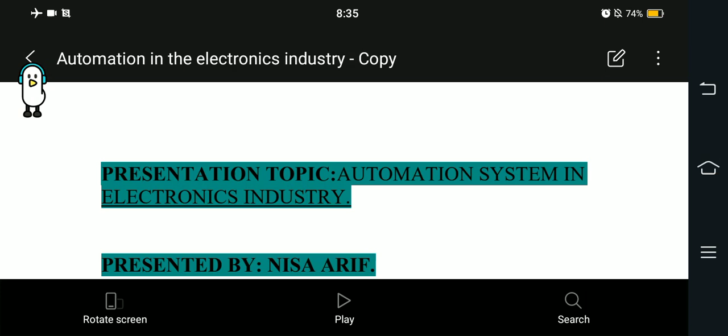So today's presentation we discuss about what is industrial automation, why there is need, their benefits, their applications, their challenges, their importance, and which type of robots used in the electronics industry.

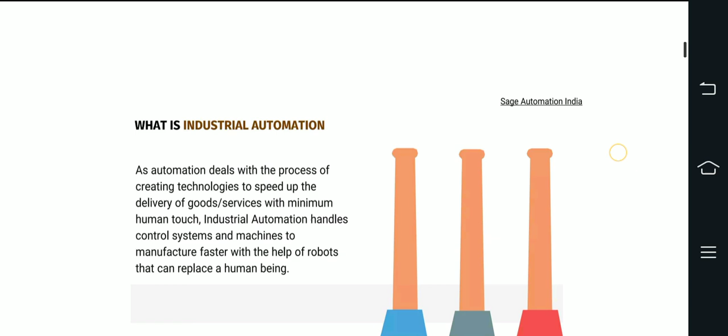So first of all, we discuss about the definition of automation. What is industrial automation? Automation deals with the process of creating technologies to speed up the delivery of goods and services with minimum human touch.

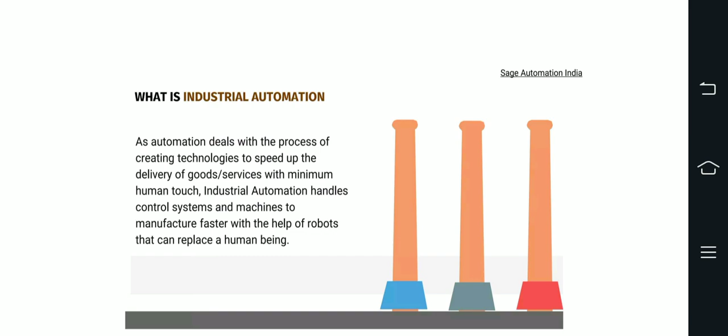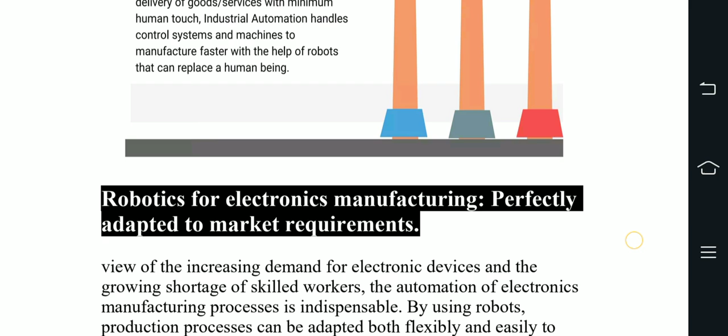Industrial automation handles control systems and machines to manufacture faster with the help of robots that can replace a human being. Robotics for electronics manufacturing is perfectly adapted to market requirements. In view of the increasing demand for electronic devices and the growing shortage of skilled workers, the automation of electronics manufacturing process is indispensable.

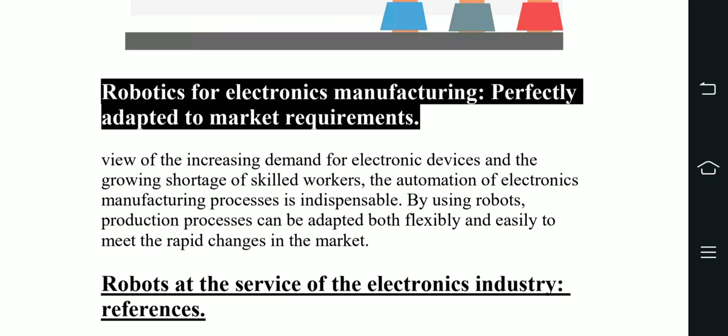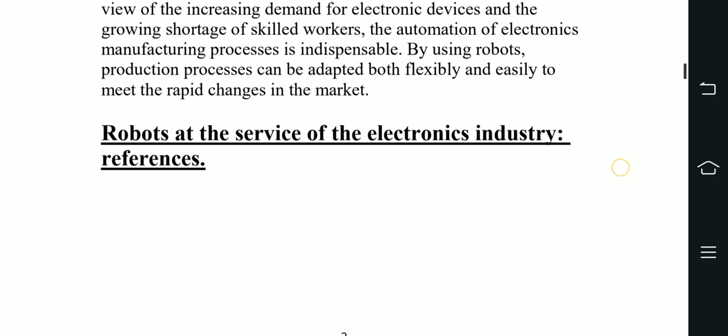By using robots, production processes can be adapted both flexibly and easily to meet the rapid changes in the market. Here are the robots which perform their function in the electronics industry. Next, we discuss about the benefits of automation in electronics.

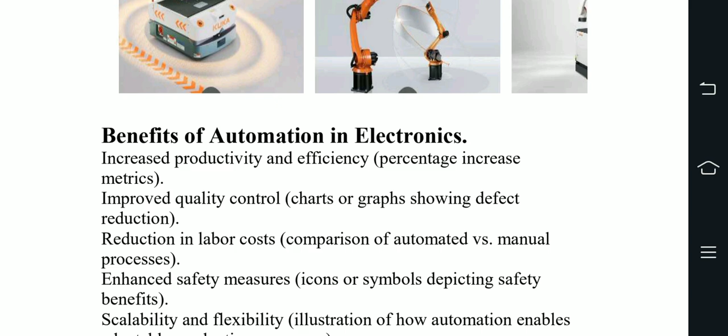First of all, increase productivity and efficiency, with percentage increase metrics. Improved quality control charts or graphs showing defect reduction, reduction in labor cost, comparison of automated versus manual processes, enhanced safety measures, and icons or symbols demonstrating safety benefits.

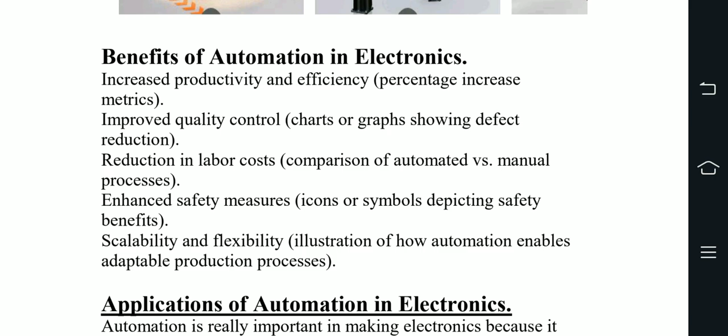Scalability and flexibility: illustration of how automation enables adaptable production processes. Next, we discuss about the applications of automation in electronics.

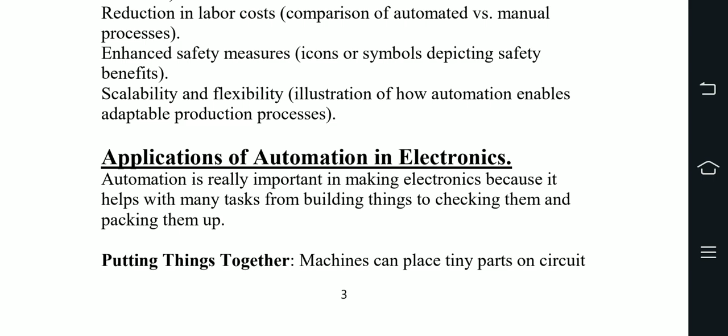Automation is really important in making electronics because it helps with many tasks, from building things to checking them and packing them up. Here's applications: putting things together.

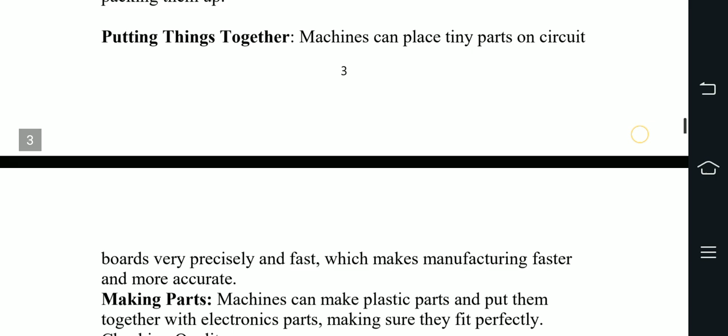Machines can place tiny parts on circuit boards very precisely and fast, which makes manufacturing faster and more accurate. Next one, making parts: machines can make plastic parts and put them together with electronic parts, making sure they fit perfectly.

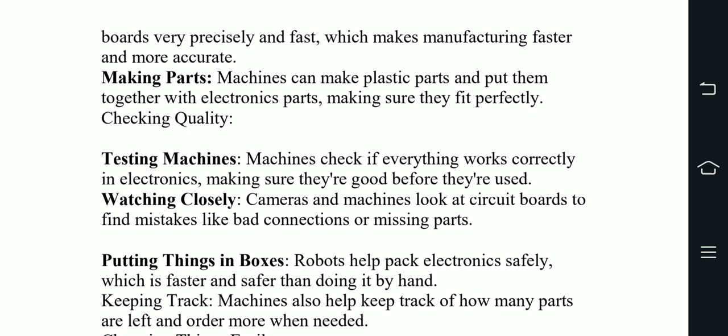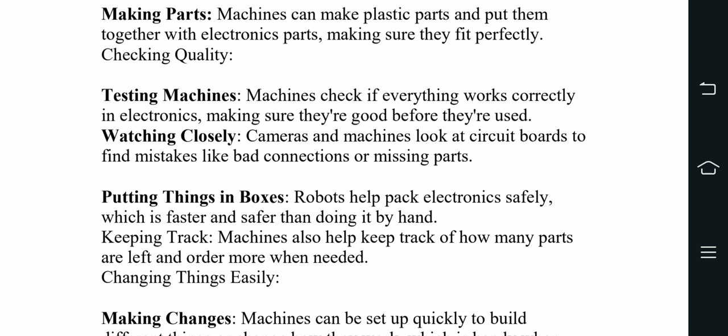Next one is checking quality. Testing machines check if everything works correctly in electronics, making sure they are good before they are used. Watching closely, cameras and machines look at circuit boards to find mistakes like bad connections or missing parts.

Next one is putting things in boxes. Robots help pack electronics safely, which is faster and safer than doing it by hand.

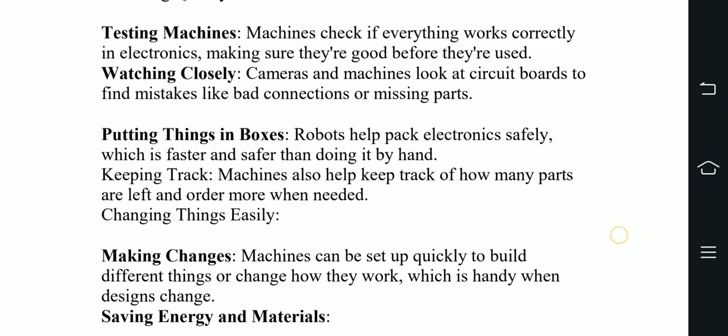Then there's keeping track. Machines also help keep track of how many parts are left and order more when needed.

Next one is changing things easily, making changes. Machines can set up quickly to build different things or change how they work, which is handy when design change.

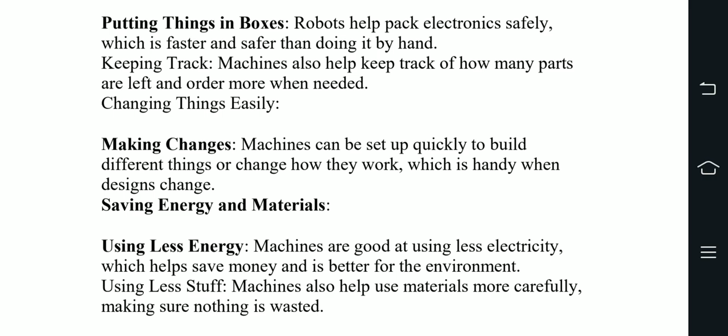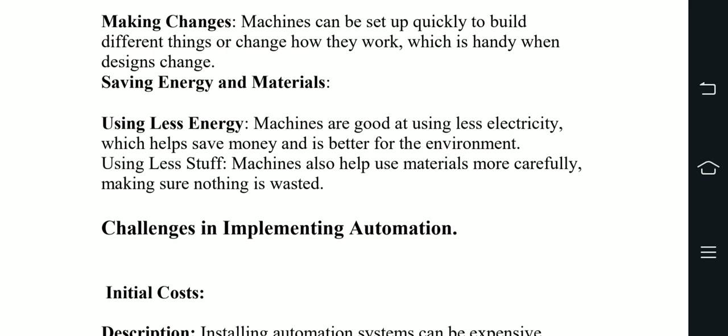Next one is saving energy and materials. Using less energy, machines are good at using less electricity, which helps save money and is better for the environment. Using less stuff, machines also help use materials more carefully, making sure nothing is wasted.

Here are the challenges in implementing automation. First one is initial cost.

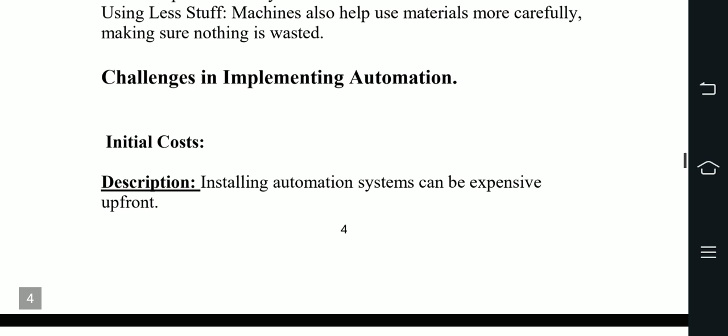Installing automation systems can be expensive upfront. This can impact small companies or those with limited funds, who may find it hard to afford. The solution to this challenge is companies can consider financing options or introduce automation gradually to manage cost.

Next one is integration with the existing systems. Making new automation work with current equipment is complex. Compatibility issues can cause delays or inefficiencies.

And here is a solution: planning well, testing thoroughly, and upgrading in stages can help avoid problems.

Next one is skilled workforce needs. Operating and fixing automation systems requires specialized skills, those persons who know about the machinery. Finding enough skilled workers can be a challenge.

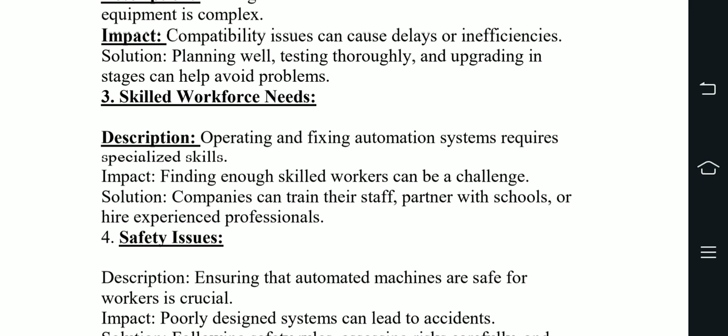Here is a solution: companies can train their staff, partner with schools, or hire experienced professionals.

Next one is safety issues. Ensuring that automated machines are safe for workers is crucial. Poorly designed systems can lead to accidents.

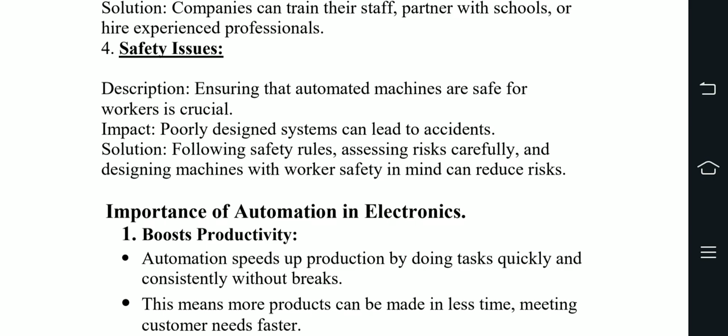And here is a solution of this: following safety rules, assessing risk carefully, and designing machines with workers' safety in mind, reduces risk.

Next point is the importance of automation in electronics. What is the importance of automation in the electronics industry? Number one, boosts the productivity of automation, speeds up production by doing tasks quickly and consistently without breaks.

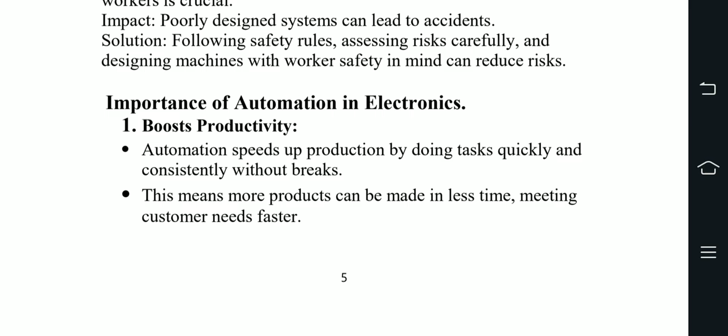This means more products can be made in less time, meeting customer needs faster. Second one is improves quality control. Automated systems are very precise and can catch mistakes early.

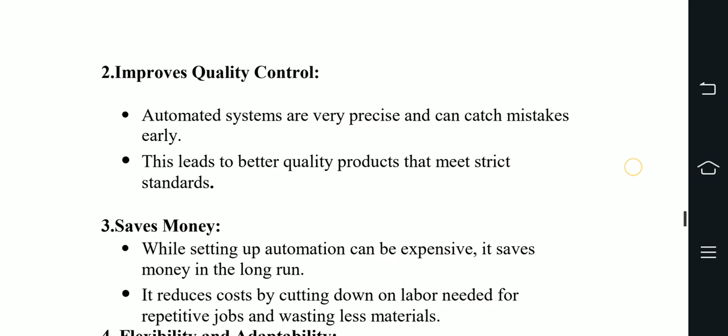This leads to better quality products that meet strict standards. Third one is saves money. While setting up automation can be expensive, it saves money in the long run.

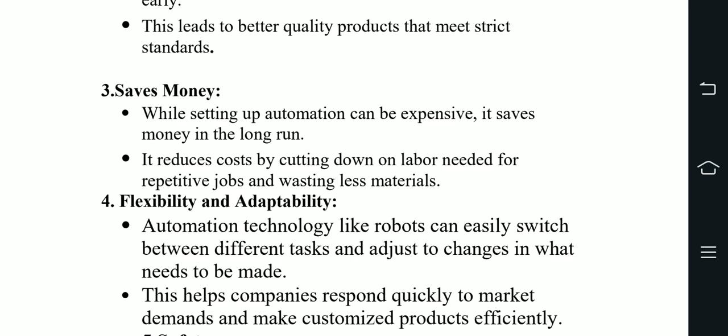It reduces cost by cutting down on labor needed for repetitive jobs and wasting less materials. Next one is flexibility and adaptability. Automation technology like robots can easily switch between different tasks and adjust to changes in what needs to be made.

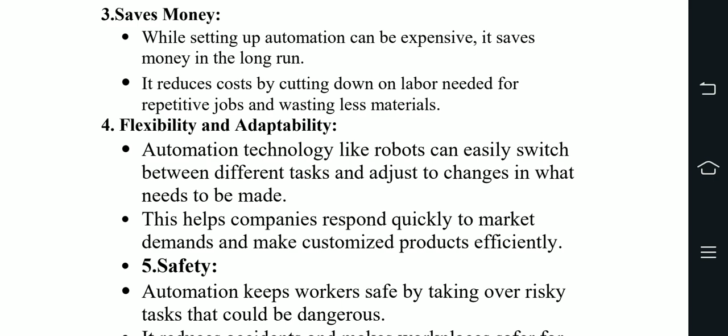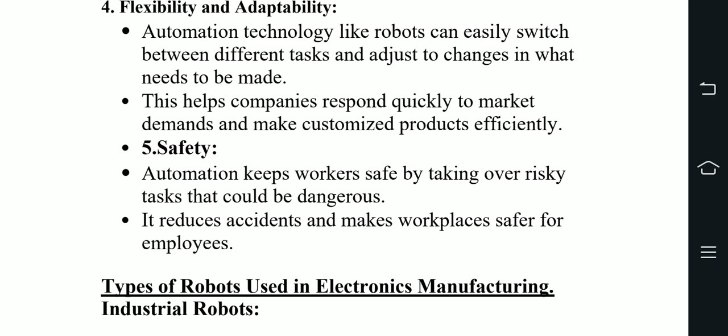This helps companies respond quickly to market demands and make customized products efficiently. Number five, safety. Automation keeps workers safe by taking over risky tasks that could be dangerous. It reduces accidents and makes work safer for employees.

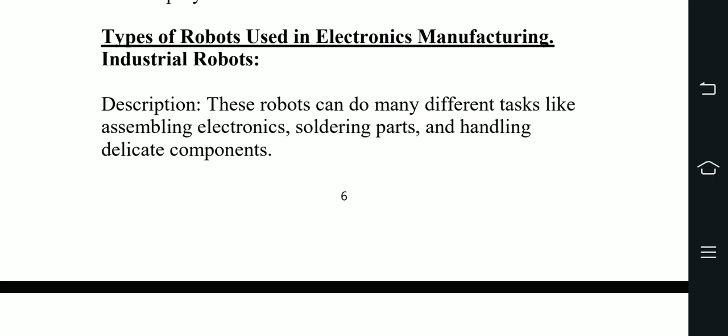The last topic is which type of robots are used in electronics manufacturing. Number one is industrial robots. These robots can do many different tasks like assembling electronics, soldering parts, and handling delicate components. They are very precise and use sensors to place parts exactly where they need to go.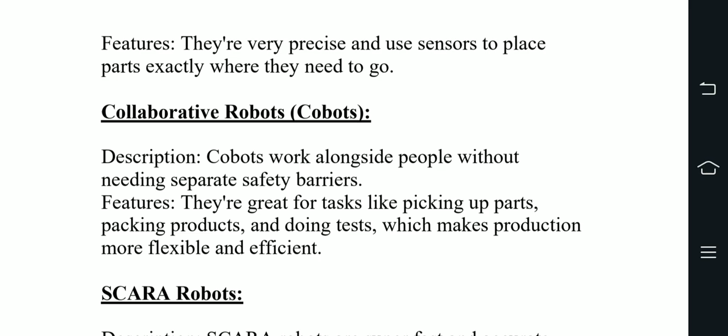Next one is collaborative robots, cobots. Cobots work alongside people without needing safety barriers. They are great for tasks like picking up parts, packing products, and doing tests, which makes production more flexible and efficient. Next one is SCARA robots.

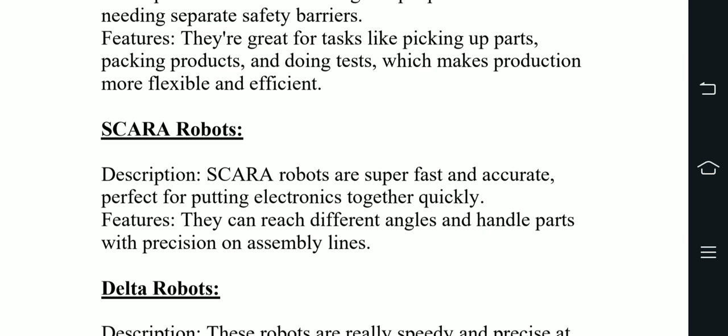SCARA robots are fast and accurate, perfect for putting electronics together quickly. Their feature is they can reach different angles and handle parts with precision on assembly lines.

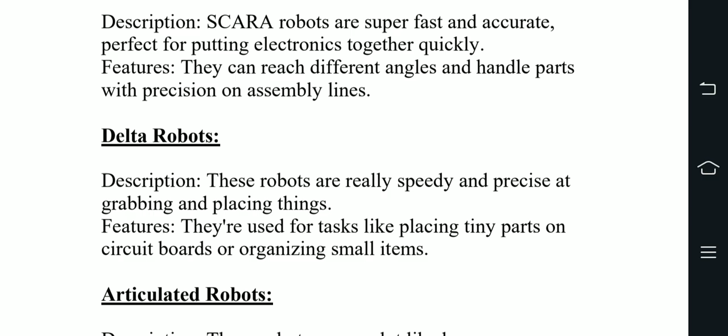Next one is Delta robots. These robots are really speedy and precise at grabbing and placing things. Their feature is they are used for tasks like placing tiny parts on circuit boards or organizing small items.

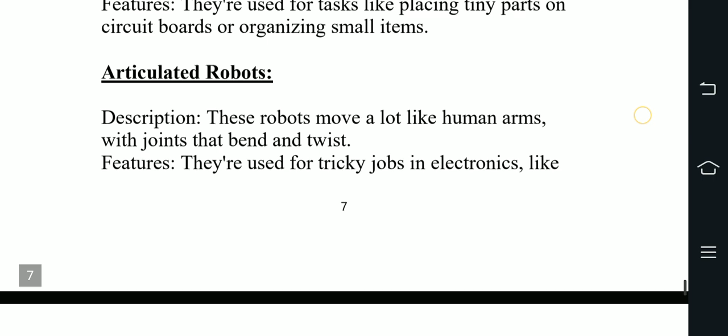Next one is articulated robots. These robots move a lot like human arms with joints that bend and twist. Their feature is they are used for tricky jobs in electronics like testing products or packing them up.

Next one is mobile robots. These robots move around on their own to carry materials between different spots in a factory. Their feature is they are smart, using sensors and maps to avoid things in their way, and they find the quickest routes.

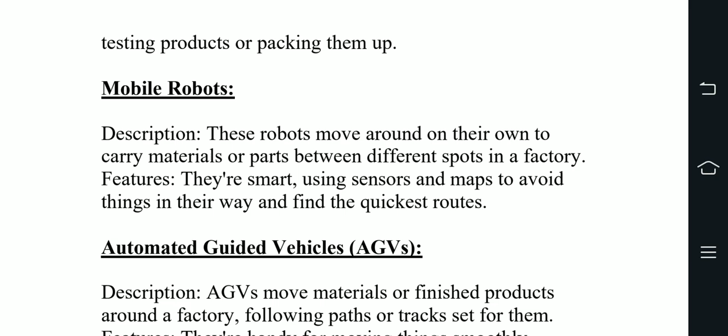And the last is automated guided vehicles. They move materials or finished products around the factory, following paths or tracks that guide them. Their feature is they are handy for moving things smoothly between production areas, storage, and shipping.